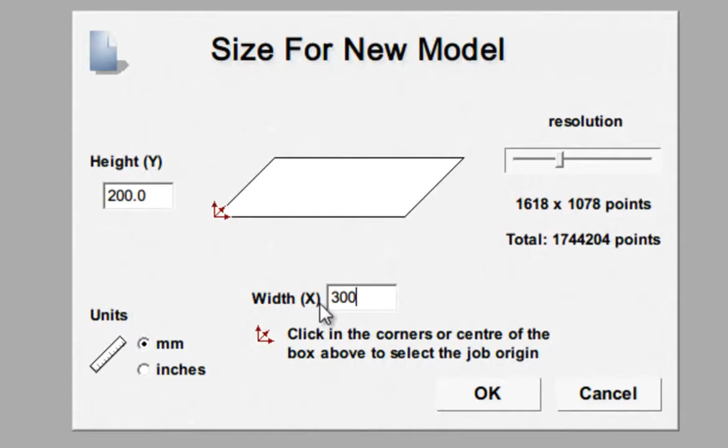Okay, here first we create a new model in ArtCAM, and I make the size like this, or I can make it a little smaller, because the flag I have is about 2 to 3, so here I make it this size and press OK. You should notice that the resolution should be bigger than your height and width, and I use the units of millimeters. Okay.

And then I open the bitmap. You can see here there are too many colors recognized. First, I found this button, Reduce Colors. Or you may go to Bitmap, Color, and Reduce Number. It's all the same. Reduce colors, and here I make it 2 because there are only red and white, the 2 colors. OK, and yes.

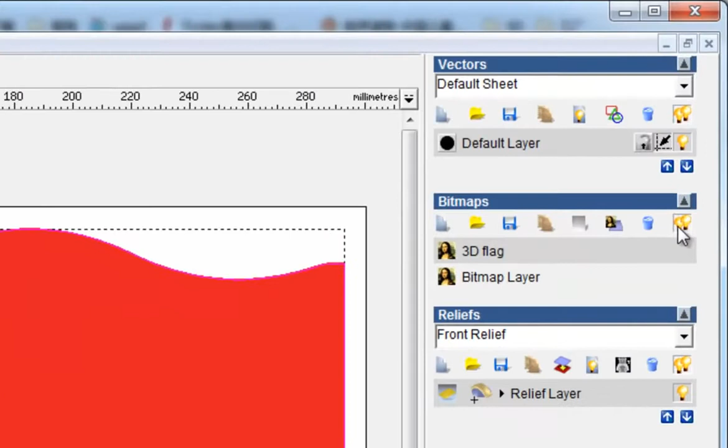And then I do bitmap to vector and create vector. Okay, I can see here the vector, and I turn off the bitmap. I don't use it anymore, and here I got the vectors. You can see there are many nodes. So I think if you are good at CorelDRAW or Illustrator, you can draw better vectors. Then you have a better effect later. Okay, here I just want to show you how to do everything within ArtCAM. Okay,

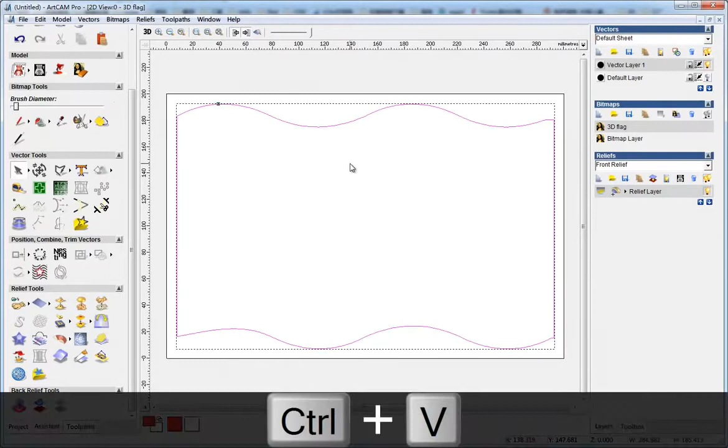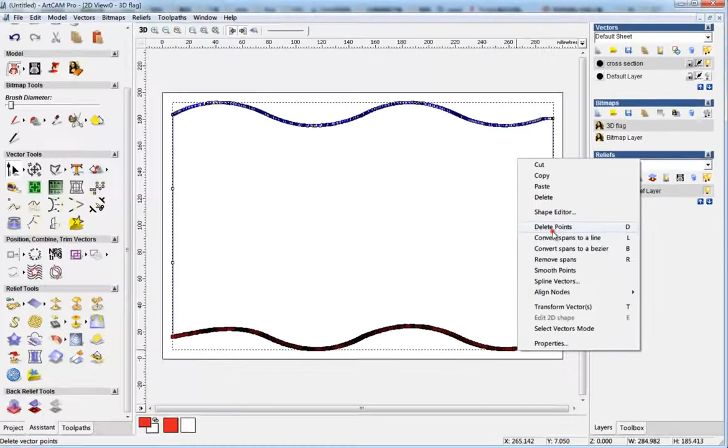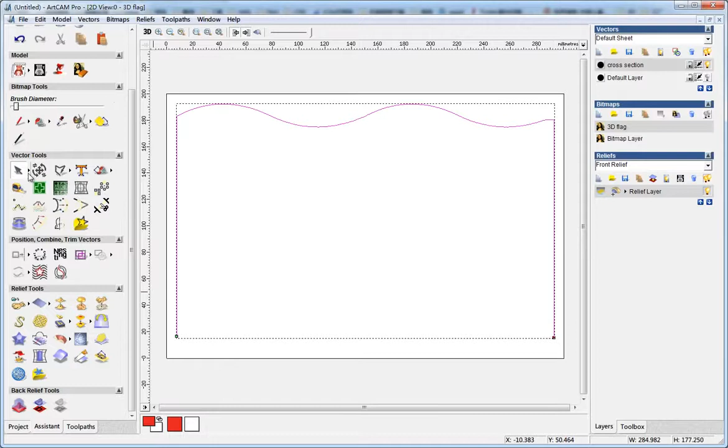and now I change back, and I copy this vector and move it to a new layer. I give it the name cross section. Okay, and nodes, I convert them first. I delete, right click the points, and then I convert it to line, convert this to line, remove span. So I made this vector open, and then select the vector and select both, then use the arrow up key on your keyboard.

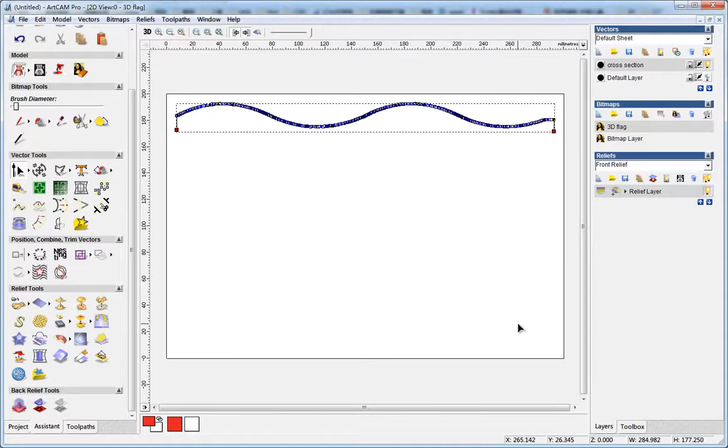Okay, and then I move it a little up so I can select it more easily when the default layer is shown. Okay, and I need to draw some lines, so I select the polyline creation, and I draw 2 vertical lines. I can hold the Control key to make it vertical, and after drawing, in the other area, I right click, okay, and I Ctrl C and Ctrl V to duplicate it,

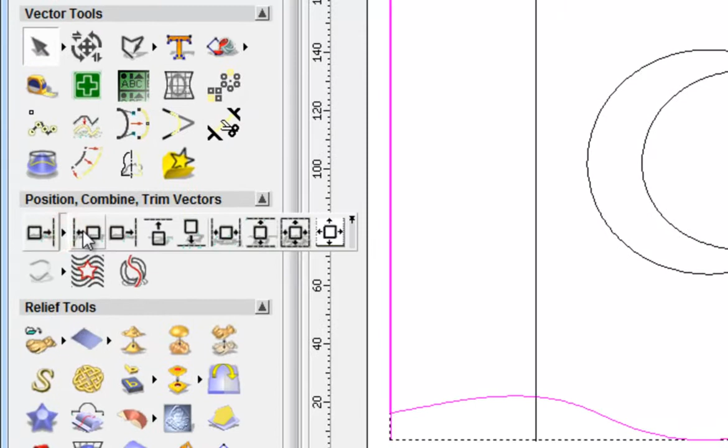and I select the line, I select the flag, and I do align left. I select the second line, I select the flag, make it align right. Okay, now all the vectors we need are okay. Now I select the two lines by holding the Shift key and do the extrude. Then you can see here the arrow, and I have selected them, and then I select the cross section, and I select here, and then I do calculate.

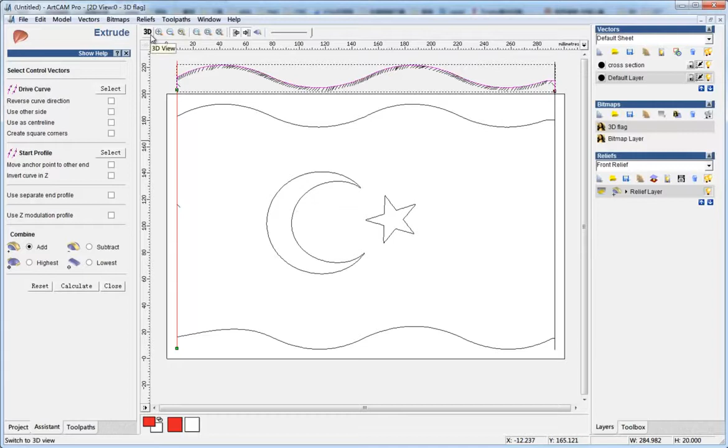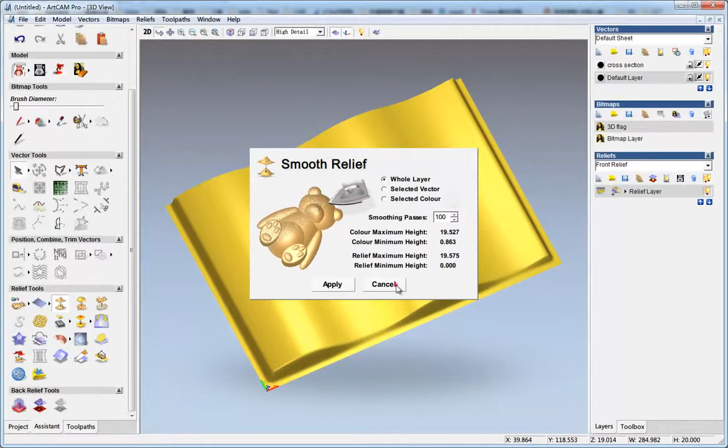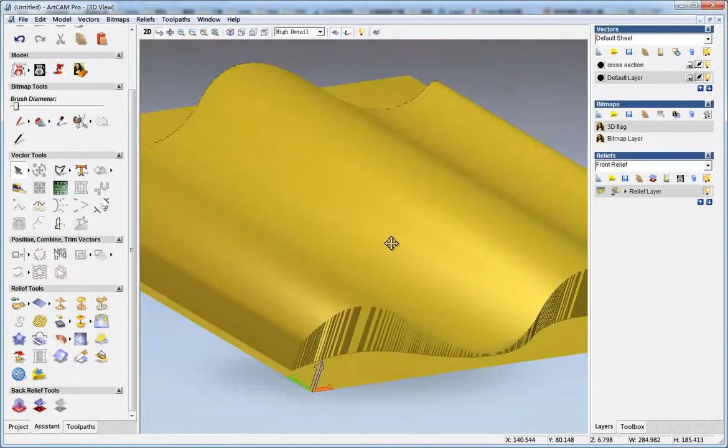Okay, you can see because there are too many nodes on the curve, it's very rough on the curved surface. So it's okay, we can smooth relief, and I make it 100 passes and apply. Okay, I think it is okay now, and then I select the flag and double click, and in the 3D view I make it Zero Rest. Okay, it's very smooth, and

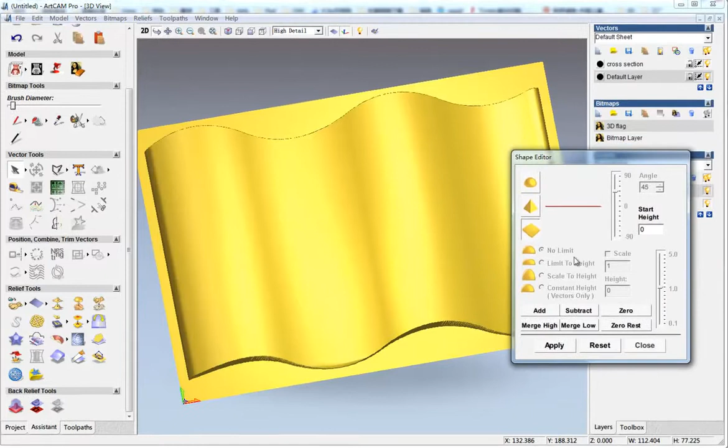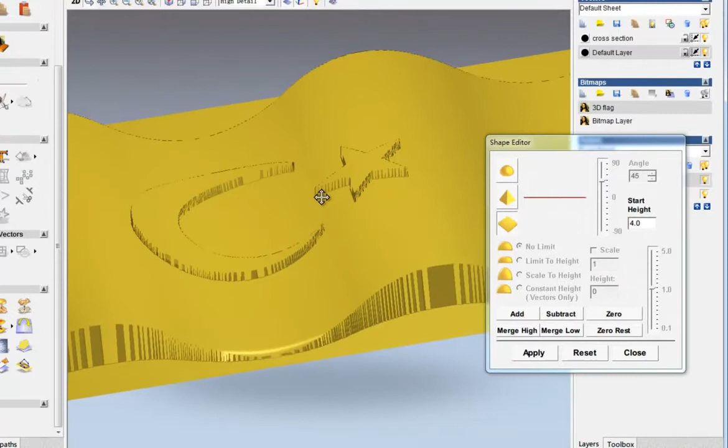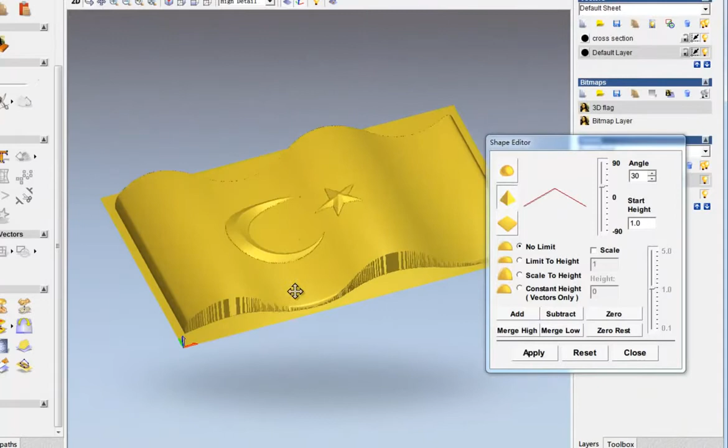then I create a new relief layer for the moons and the star. So I select them both and double click. So here you can have any effect that you want. For here, if I make it 4 and add, you can see the effect here. You see, it also goes with the curved surface here. If you're not satisfied with this, you can Ctrl Z to cancel and try another method. Make it 1 and make this 30 and add. Okay, you can see this effect. If you're still not satisfied, you can also Ctrl Z and change it. Okay, I think this time it's almost okay.

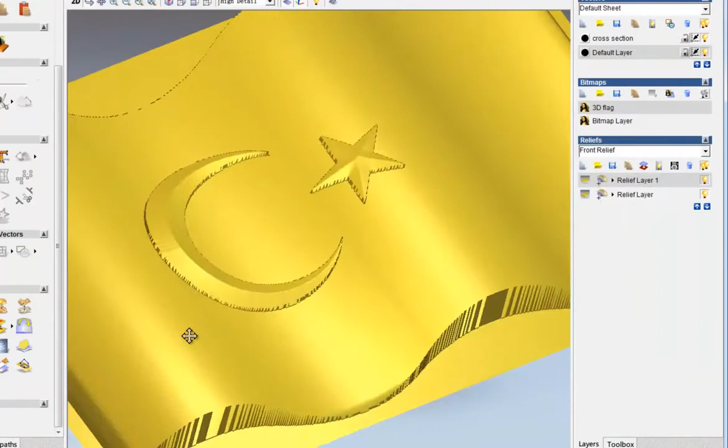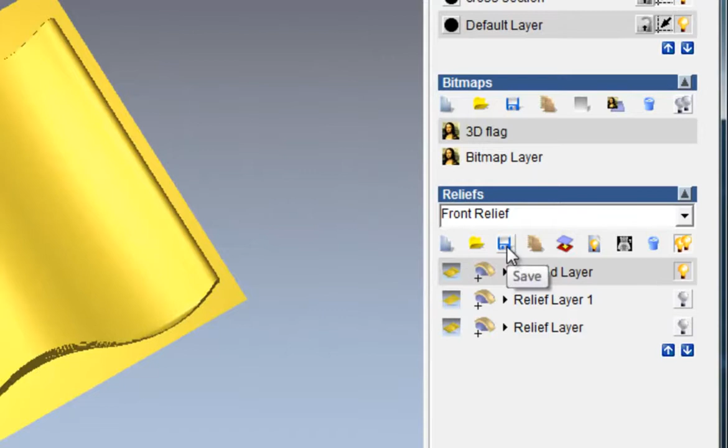So you have made the relief in ArtCAM, and now we can save this relief so we can use it in other work. First we need to merge visible and turn off the separated layers we made before, and only keep the merged layer, and then I select it and save. Flag 1, and like this, save, and you can see the image is made, and then you can import it later in other work.

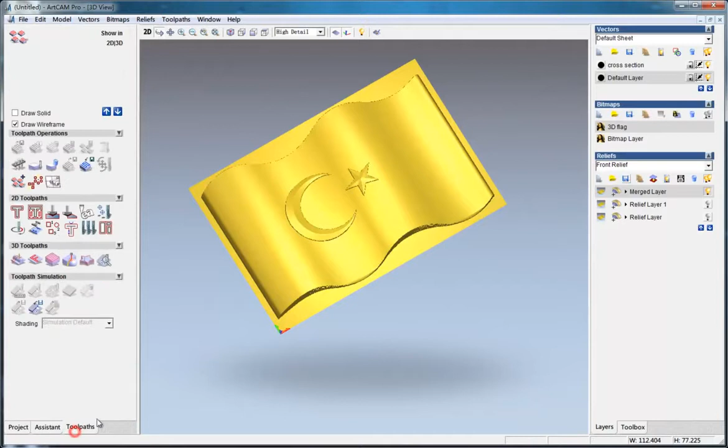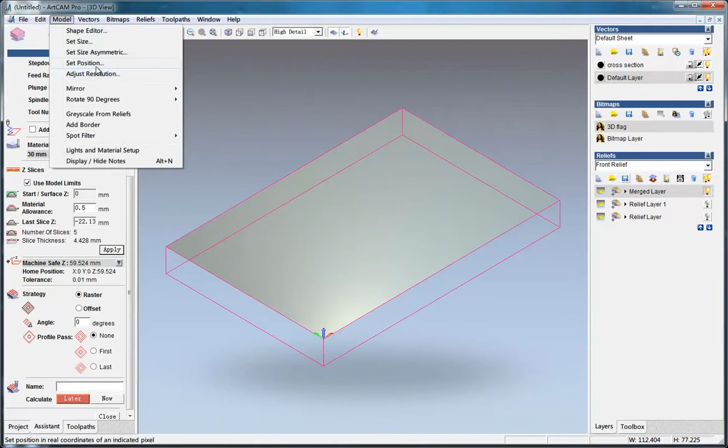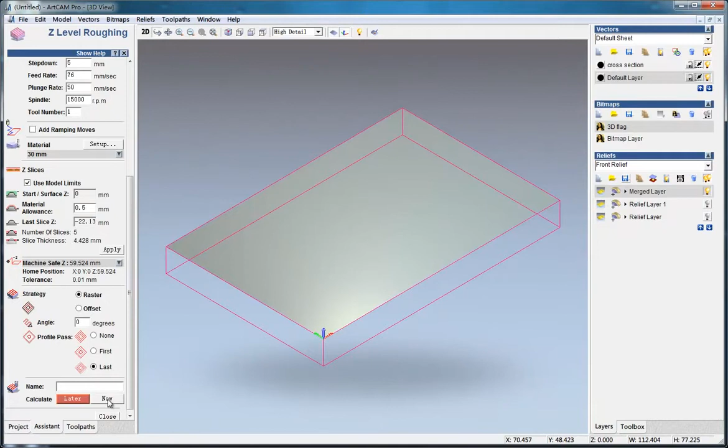Okay, and now I show you how to machine the relief. Now we do the Z-level roughing. I select a tool, 6mm, or because it's a small size, I choose a small tool here and make it like this. Apply, and then for set position, I made the bottom left to be the start point. Okay, and the material make it 30 thick, and the relief thickness is 12.2. Okay, and do a profile pass at last, and now. Okay, we can simulate the pass. Okay, here is what we got, and then do the machine relief.

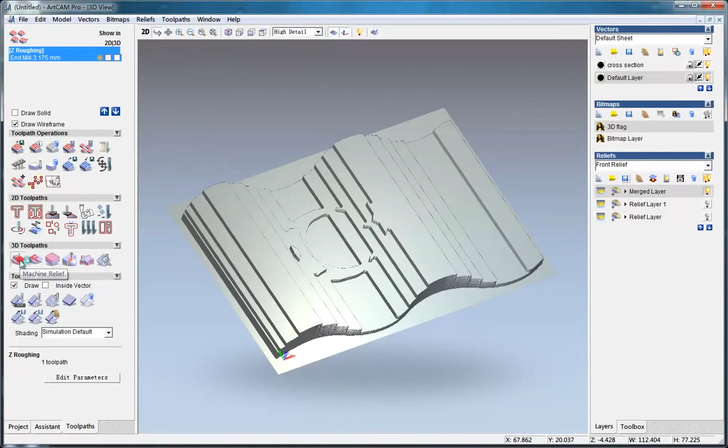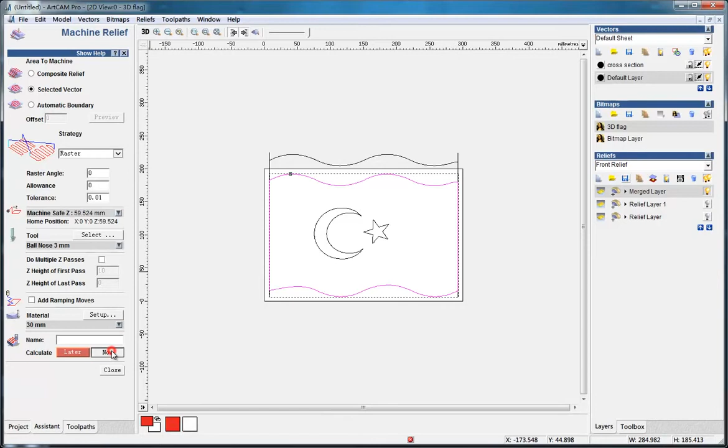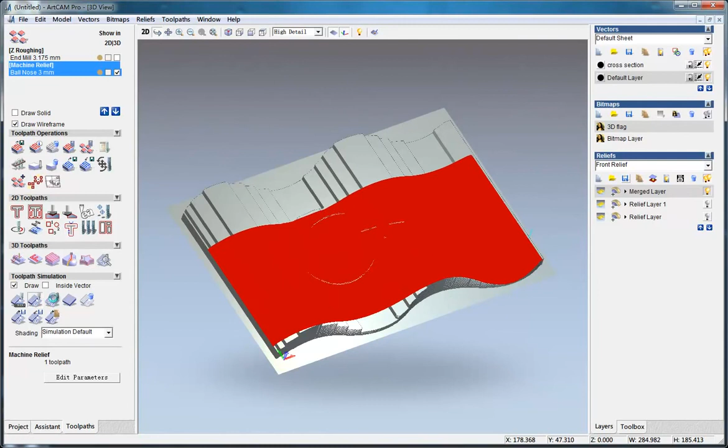I select the flag and do selected vector and choose a tool of ball nose 3mm. Select, and now. Okay, simulate it. Okay, you can see the final effect. I think it is just okay.